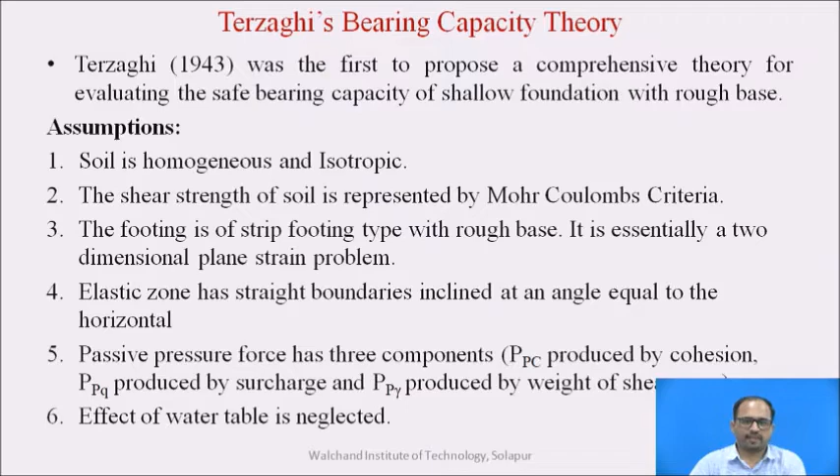The next assumption: the footing carries a concentric and vertical load, and limit equilibrium is reached simultaneously at all points, so complete shear failure is mobilized at all points at the same time. Then, the properties of the foundation soil do not change during shear failure.

Next, limitations of Terzaghi's bearing capacity theory. The first limitation is that this theory is applicable to shallow foundations only. As the soil compresses, the angle of internal friction increases, which is not considered. Hence, a fully plastic zone may not develop at the assumed angle of internal friction. All points need not experience the limit equilibrium condition at different loads. These are the limitations of Terzaghi's bearing capacity theory.

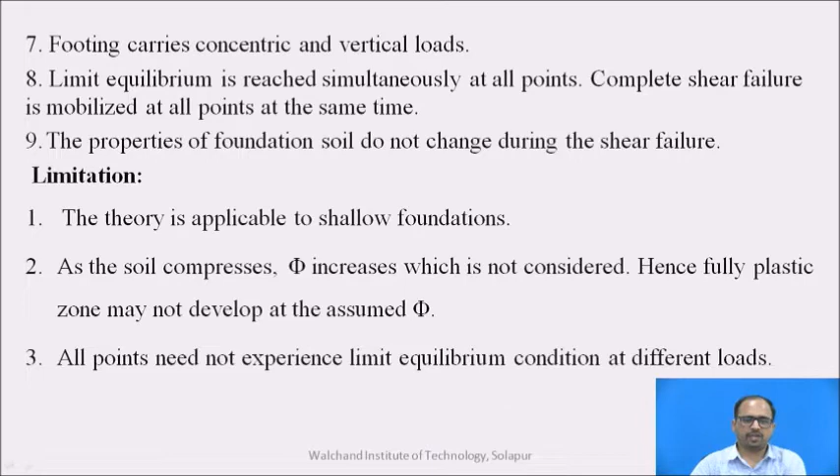Now we will derive Terzaghi's bearing capacity equation. This is our ground level, and this is the strip footing having width B. It compresses the foundation soil underneath due to the vertical loads from the superstructure. Let qu be the final load at which the foundation soil experiences failure due to the mobilization of the plastic equilibrium condition.

This is our ground level, and this height is the depth of the foundation. Up to exactly this depth we fill the soil after excavation, and after filling, this soil creates the effective overburden pressure, q = γ·Df, where γ is the unit weight of soil and Df is the depth of the foundation.

We will consider three zones. This is the first zone, and the second zone is radial shear. This is the third zone at an angle of 45 minus φ/2, and this line you can extend up to ground level. The angle here is φ. Now we give some notations: consider triangle A, B, D, and E, F, G, I, and at ground level K and J.

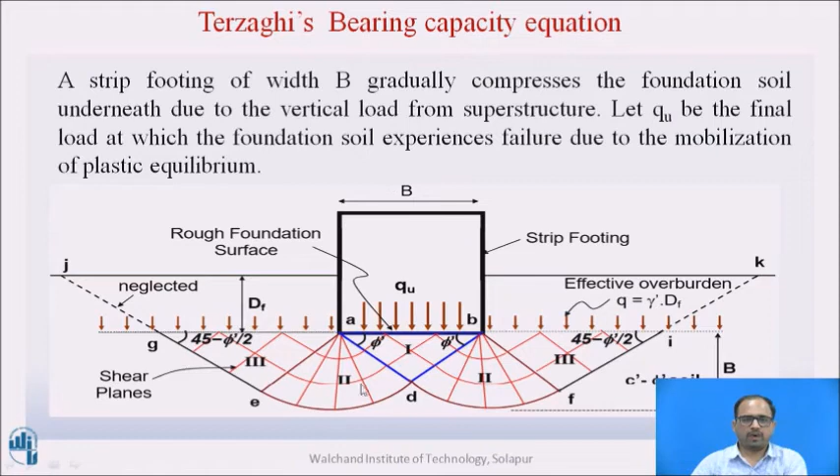Next, consider only this part of the strip footing and assume it is in an equilibrium condition. First, consider vertical forces: qu multiplied by the width of the foundation gives the vertical force qu·B, equivalent to the upward forces. The upward forces are first Pp, the passive pressure at an angle φ on both sides, so we multiply by 2Pp.

One more force acts, which is cohesion. Resolve this cohesion at an angle φ, acting as C·A. The entire width of the foundation is B; considering only this width, we get B/2 divided by cos φ. So we have 2·C·A·sin φ minus 1/4 γ B² tan φ.

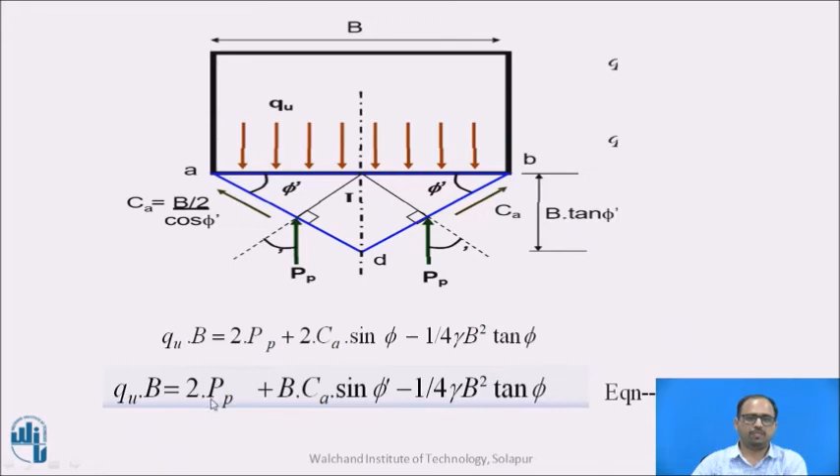Okay, you substitute in the first equation here: Qu into B equals 2 of Pp of gamma plus Pp of C and Pp of surcharge, that is q, plus BC tan phi minus 1/4 gamma B squared tan phi.

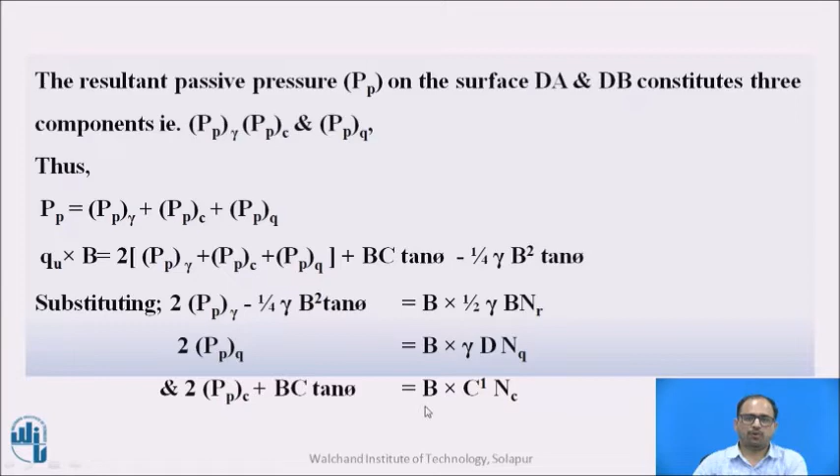And substituting, 2 Pp of gamma minus 1/4 gamma B squared tan phi is equal to B into half gamma B N gamma, and 2 Pp of surcharge, 2 Pp of q, is equal to B into gamma into D into Nq, and the last term, 2 Pp of C plus BC tan phi, is equal to B into C into Nc.

Then we get the generalized equation Qu is equal to C Nc plus gamma into Df into Nq plus 0.5 gamma B N gamma. Here C is cohesion, gamma is unit weight of soil, Df is depth of the foundation and B is width of the foundation.

And this is Terzaghi's bearing capacity equation for determining the ultimate bearing capacity of a strip footing, where Nc, Nq, N gamma are Terzaghi's bearing capacity factors. These bearing capacity factors mainly depend on the angle of shearing resistance phi.

Sometimes the bearing capacity factors Nc, Nq, N gamma are not mentioned while calculating your ultimate bearing capacity. At that time you use these three formulas.

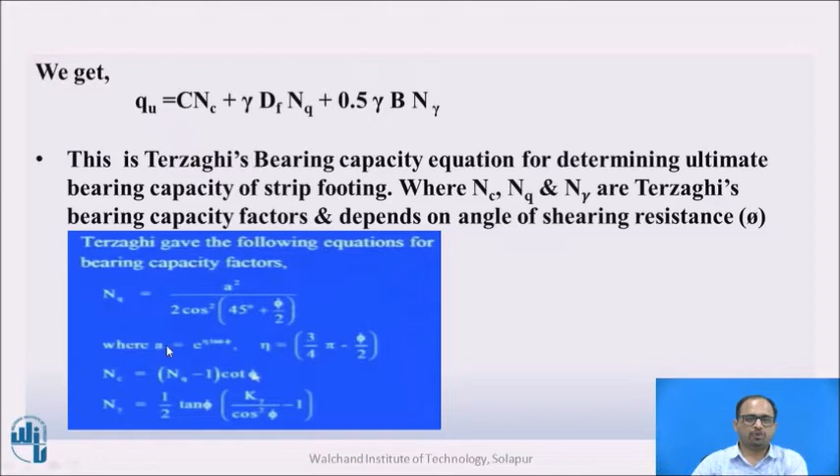Next, the effect of shape of foundation. The shape of the footing influences the bearing capacity, and Terzaghi and other contributors have suggested corrections to the bearing capacity equation for shapes other than strip footing based on their experimental findings. The following are corrections for circular, square and rectangular footings.

Then what is the circular footing formula? Qu is equal to 1.3 C Nc plus gamma into Df into Nq plus 0.3 gamma B N gamma. And what about square footing? Qu is equal to 1.3 C Nc plus gamma Df Nq plus 0.4 gamma B N gamma.

And the last one, rectangular footing: Qu is equal to C Nc (1 plus 0.3 B/L) plus q Nq plus 0.5 gamma B N gamma into (1 minus 0.2 B/L). B is width of the footing and L is length of the footing.

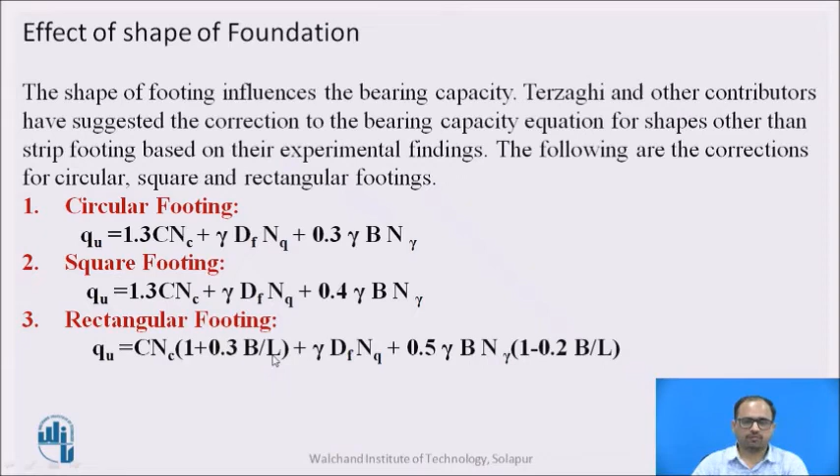Now we will solve one problem on how to calculate safe bearing capacity. Determine the safe bearing capacity of a strip footing 2 meter wide at 2 meter depth resting on a dry sand bed. Consider unit weight of sand as 18 kN/m³ and bearing capacity factors Nc equal to 35.5, Nq 23.2, N gamma 22, corresponding to an angle of internal friction of 38 degrees, and factor of safety 2.5.

First, note down the given data. Width of the foundation B is 2 meters, depth of the foundation is 2 meters, unit weight of soil is 18 kN/m³, and the factor of safety is 2.5.

Your first step is to find the ultimate bearing capacity Qu. The formula is Qu equals C Nc plus gamma into Df into Nq plus 0.5 gamma B N gamma. The first term becomes 0. Why? Your footing is resting on a sand bed, and in sand C is 0; it is a cohesionless soil.

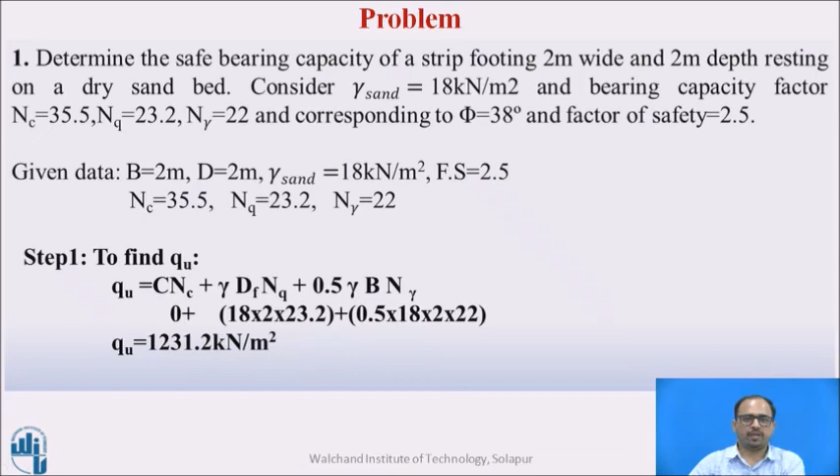Unit weight of soil is 18, depth of the foundation is 2 and Nq is 23.2, plus 0.5 into 18 into 2 into 22, giving the ultimate bearing capacity. The next step is to find the net safe bearing capacity: Qns equals Qu minus q. Qu is 1231.2 minus q, and how do we calculate q?

q is gamma into depth of the foundation; unit weight of soil is 18 and depth is 2, giving 36. So the net safe bearing capacity is 1195.2 kN/m².

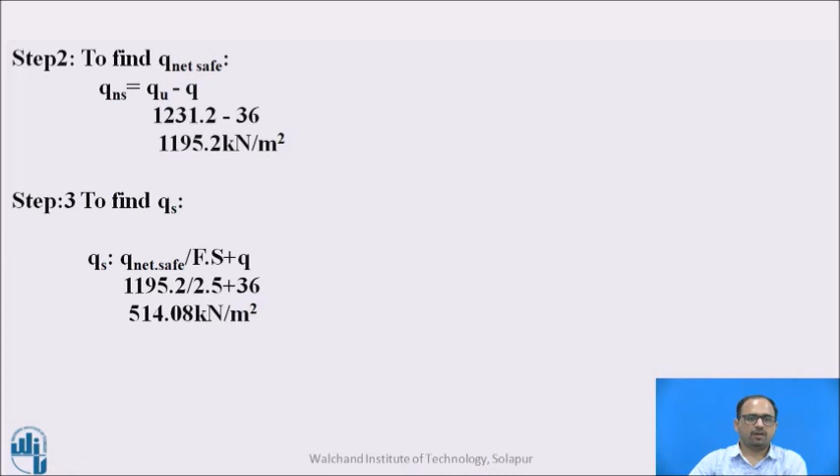Now you can calculate the safe bearing capacity. Qs is equal to Q net safe divided by factor of safety plus q. You already calculated the net safe bearing capacity: 1195.2 divided by 2.5 plus q of 36 gives the safe bearing capacity of this footing.